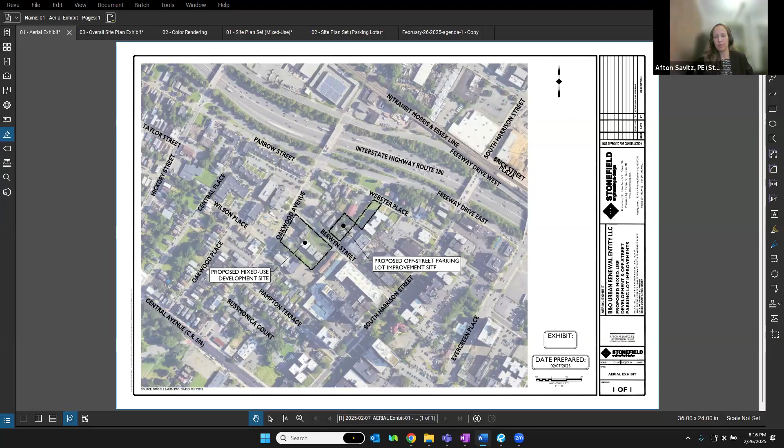I'll zoom in a little bit just to show a little bit clearer the aerial as it relates to existing conditions. Again, circling with my cursor, the bold black lines with the double dots, those are indicative of the outermost property line for the application. So along the southern portion, that's where the mixed use building will go. And again, the parking lot will be across the way.

In terms of access frontage, where these blocks are located, there's frontage for Berwyn Street, which is under local jurisdiction, approximately 100 linear feet for the parking lot, 326 for that of the mixed use building. And for Oakwood, again, similarly under local jurisdiction, 277 linear feet for the mixed use building. Continuing up on Webster Place, there is a connection with access for the parking lot on Webster Place, 60 linear feet in terms of that frontage. Beyond that, you'll note the freeway that you can connect through to, but direct access is that on Webster.

In terms of existing structures that are on the property, to the south, the larger composition of lots, there are 6 apartment buildings unoccupied on this lot. I'm sure you'll notice on Oakwood Avenue, there's a construction fence or a silt fence that's up that borders that western property line. And to the north, along the 3 lots on Berwyn Street, there are a couple single-family structures and then a vacant lot or an undeveloped lot as it exists along Webster.

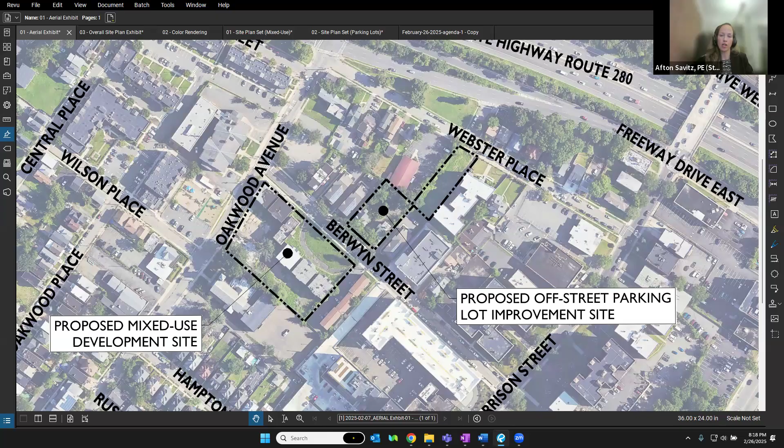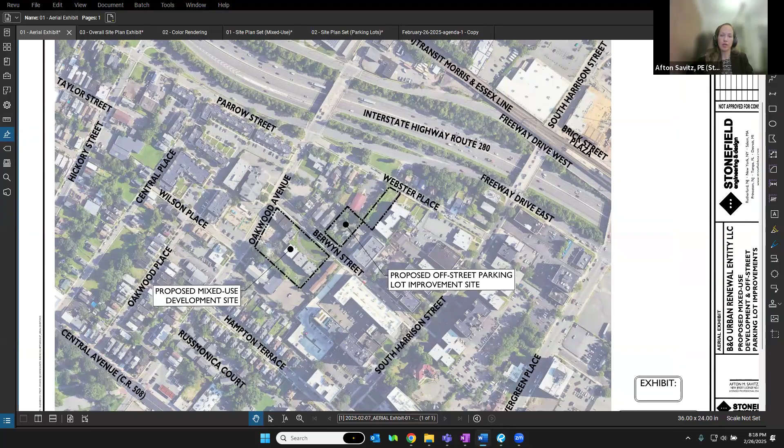Again, I'll zoom out just for the board's reference as to where this project is. My subsequent materials, some of it splits them up. It may rotate it. I do have an exhibit that keeps them together. I know the board engineer alluded to understanding the connectivity across the street to ensure pedestrian safety, but as it relates to existing conditions, I will transition from that to my next exhibit to touch on the proposed conditions.

So this will mark as A2. It is an overall site plan exhibit prepared by our office. It's dated February 25th, 2025. And it's somewhat of a similar orientation where you have on the bottom, the mixed use building and the parking lot across the way. Any material that's been submitted to you, for the most part, this probably looks like it's flipped upside down as it relates to the mixed use building, but I think it tells a nice story as to how, if you're parking across the street, you get to the building and vice versa. From here, I'll show some things in color, and I'll of course leave the architect to show pretty pictures as well, but this shows you the interconnectivity of both portions of the development.

As mentioned, and I think counsel did a good job touching on it as I'm circling with my cursor, this is the mixed use building. As it exists, as it was previously designed with very little change from the prior application. 173 residential units, 1,013 square feet of retail. Again, when I zoom in here, you'll notice from the site plan sheets that you're familiar with, it is flipped 180 degrees. So the retail is at this corner, closer to Berwyn and Oakwood. There's access as proposed off of Berwyn Street into a portion of covered parking with redundant access back out to Oakwood that's divided.

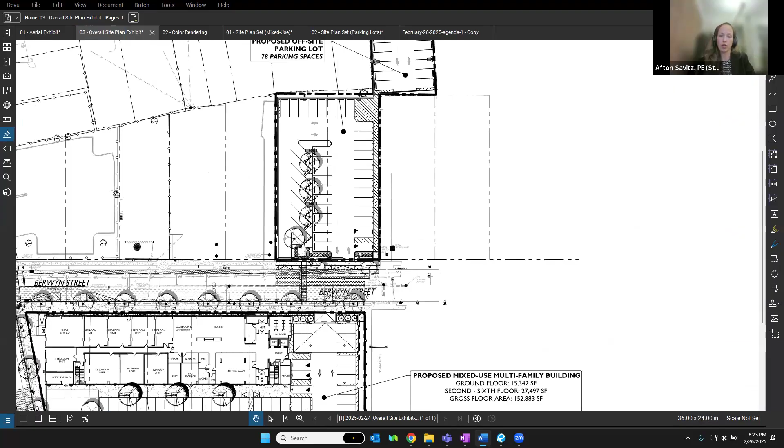I'll zoom in a little bit just to note it because it was somewhat unclear based on submitting separate documents to the board. But there is a crosswalk that allows for safe egress across Berwyn Street, and then all of the streetscape along both frontages, complete with street trees, is proposed to be improved. Again, very similar to the original application as it relates to the improvements.

Retail, I know the board engineer notes in the letter received about loading for retail. It's a little difficult to tell. I'll circle with my cursor. There is a loading space that's indicated on street in support of the retail space. We are seeking relief as it relates to the physical striping of the loading space, 8 feet wide by 25 feet long, where 10 feet wide by 25 feet long is required.

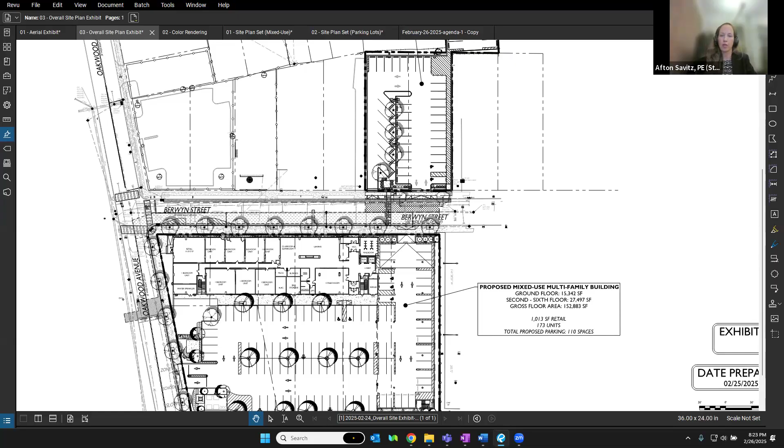But it's worth noting there's striping on either side of this space. So in terms of vehicles, whether they're dropping off Amazon packages, mail, they can certainly pull in. And when you add the striping on either side of it, that length that you yield can take a small box truck as well. So while slightly smaller than, at least as striped, the ordinance contemplates, we have worked closely with the architect, with the traffic engineer to provide adequate loading.

In addition, I will continue to focus on the parking lot as well. As mentioned by counsel, there is relief as it relates to impervious coverage. Again, one of the design constraints for this parking lot, especially previously, was how can we fit more parking, in discussion with the city, to support the application. And we've worked to do that where we can. Again, the lot is narrow. There are some limitations as it relates to the overall width, but we've balanced the parking supply, the impervious coverage, the landscaping to the best of our ability.

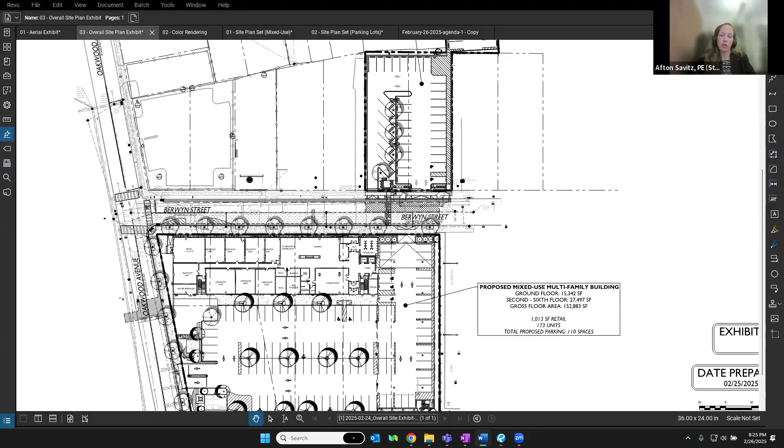In terms of lot and proposed impervious coverage, when you think about both of the parking areas together, against the ordinance where 90% is the max impervious coverage, 91.3% is being proposed. In terms of screening, along the property lines of all of the parking lot exists either a wall or an existing fence that will provide screening. We do note, as mentioned, there's relief for buffer screening, or providing a buffer off of the property line, in this case again based on balancing the parking and the pedestrian trespass in conjunction with that.

In terms of stormwater management, I mentioned that under existing conditions, all the rainfall flows over the property, over any paved area into the right of way and eventually the city infrastructure system today. Both properties, I kind of treat them as three, just knowing that the parking lots are somewhat separate, will all have stormwater management improvements. They will collect the water and slow it down, not to mention treat it to ensure that any water that's traveling over the motor vehicle surfaces is cleaned.

From a utility standpoint, the parking lot only has lighting, and then what's required for operation of any gates on the property. So new electric will be proposed and fed through close coordination with the utility provider. And the lights on the property, similar to that of the mixed use building, they're LED, they're downward facing, they're dark sky compliant in an effort to distribute a uniform lighting design. In the parking lot, there are pole lights. Again, in terms of any trespass beyond the property line, those existing fences, those walls are preventing that as well.

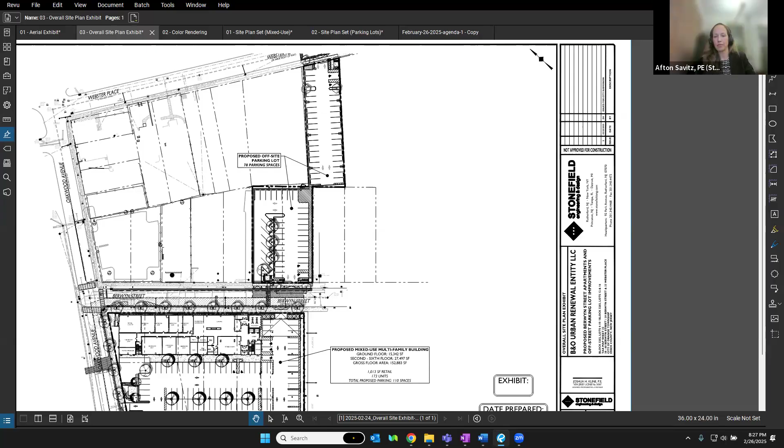I'll also go so far as to clarify for the mixed use building. I know we mentioned the relief that was previously granted regarding the foot candles as it relates to property line conditions. Those locations are in the right of way. So any of the interior property lines where you're abutting a neighbor, there's a proposed fence, not to mention no trespass as part of the proposed design. Again, I know I haven't shown anything individual to the mixed use building or that of the parking lot. I do think they tell a nice story together, so I'll leave this screen up here.

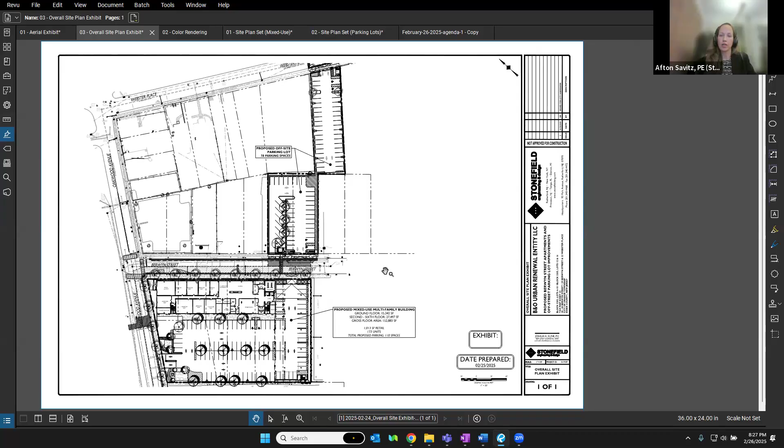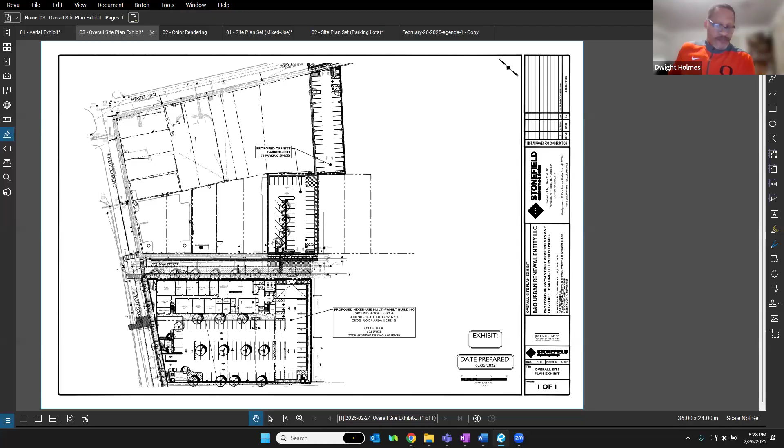This does conclude my direct testimony as it relates to civil engineering, but I'm happy to answer any questions from the board, the professionals, or the public. Mr. Holmes, I don't have any further questions for this witness. To the extent that we've completed our case in chief, I'll yield the witness to your hands. Okay, then I will ask any board member if you have any questions for Ms. Savitz. Seeing none, hearing none. Thank you, Ms. Savitz, for your testimony. Thank you.

My next witness is my architect, Stephen Tietke. Stephen, it's a little dark. Yeah, I apologize. I was trying to adjust my camera, but this is as bright as it's getting.

It seems to be a theme with Attorney Webster. He's got this very dramatic mood lighting. Yeah, mood lighting. So I guess that goes along with his professionals. Yeah, but I apologize. All right. So, all right, Stephen. Okay, gotcha.

Do you swear or affirm to tell the truth for this planning board tonight? I do. Okay. Can you please state and spell your name for the record? My name is Stephen Tietke, T-I-E-T-K-E. Okay, and let's get Mr. Tietke's qualifications on briefly. Mr. Tietke, would you please provide the board with the benefit of your education, your training? Please indicate that your New Jersey license is in good standing. Yes, I hold a bachelor's of architecture from Drexel University. I graduated in the year 2000, and I'm a licensed architect in the state of New Jersey, and my license is in good standing. And I've provided testimony before boards across the state, including, I believe, before this board for the amended approval that we were discussing.

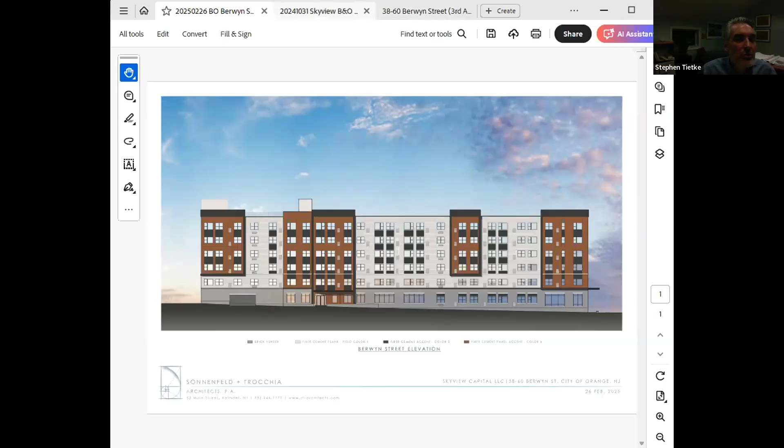I will move now to the floor plans. At the first floor, as we discussed, we provide an entry lobby, fitness room, clubhouse, game room, mail room, and leasing. We include 8 dwelling units at this first floor, a retail space and services, the refuse room, bike storage, meter rooms, and we have some covered parking as well as surface parking.

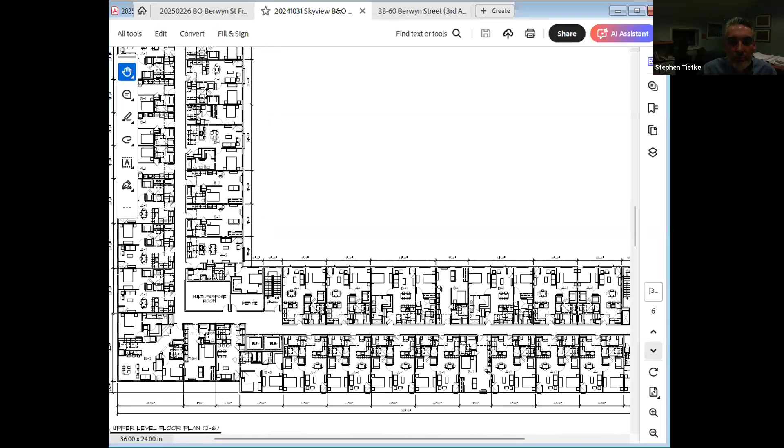On the upper floors, we have a mix of just strictly units, and we've incorporated a multi-purpose room at every floor. There's also a refuse collection room at every floor that'll have a trash chute that communicates down to the refuse room at grade. And at the roof, we're proposing a rooftop deck.

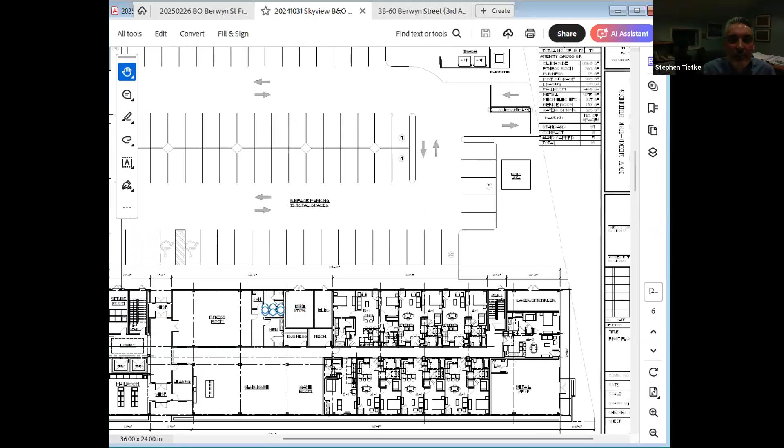The unit count would now go back to the original approval, which is 173 units, and we're proposing 41 studio units, 96 one-bedroom units, and 36 two-bedroom units. I'll go back quickly to the parking level plan because as we were discussing in the civil engineer's testimony, we are providing a roll-up door at the entry to the garage for security, and there are two arm gates at the surface parking entry. That's really my architectural testimony, unless anybody has any specific questions for me.

Mr. Chairman, I don't have any further questions for this witness. Mr. Tietke, can you speak to the, I'm sorry, go ahead, Vice Chair Jones. Oh, I was just wondering, what was the rationale for removing the school space from this? The school space, well, I think that was negotiated between the developer and the city. And I'll be honest, I don't know the particulars. Okay. Thank you. The architect doesn't know. Yeah. Okay. Make it a good guess.

I can tell you, we originally had a plan that didn't have any of the school space. During our conversations with the municipality about obtaining a tax abatement, we were introduced to the concept of working with the school board. After quite some time, going back and forth and designing the space and actually getting site plan approval from this board, the school board determined that they didn't need the classrooms. We met with the Board of Education, we met with the superintendent and their leadership, and they decided that we did not need it.

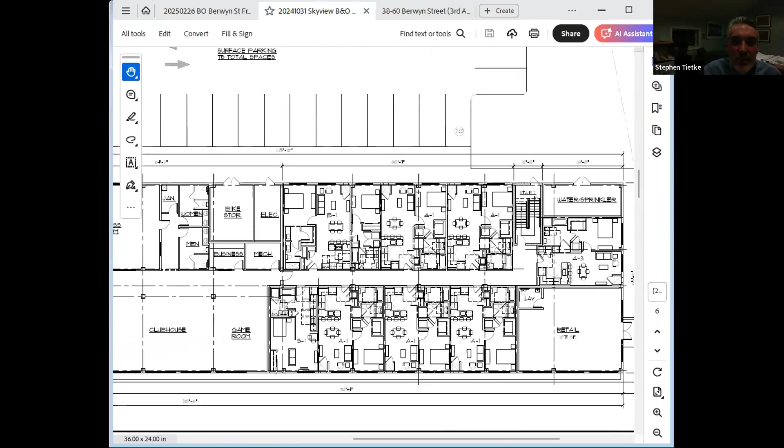The units on the first floor are typical of the units throughout the building. So we have one studio unit, 1, 2, 3, 4, 5, 6 one-bedroom units, and 1 two-bedroom unit at this level. And I can zoom in if you'd like to see the layouts. I'm sorry, how many two-bedroom? There's 1 two-bedroom at this level. One, okay. Right. And the remainder are 1 studio, and then the other 6 are one-bedroom units.

And what do those dwellings consist of? Is there a washer, dryer? Yes, all the units have their own dedicated washer dryer. They have their own kitchen. They have their own bathrooms. The studio units have a PTAC unit that provides HVAC, and then the 1 and 2 bedroom units have what we call a magic pack unit, but it's a centralized HVAC system that's specific to that unit.

So each unit has its own washer and dryer. Yes, and each unit is able to control its own AC temperature efficiency and air. Yes. Okay. All right. Thank you. Member Faustin. Yeah, thank you, Chair.

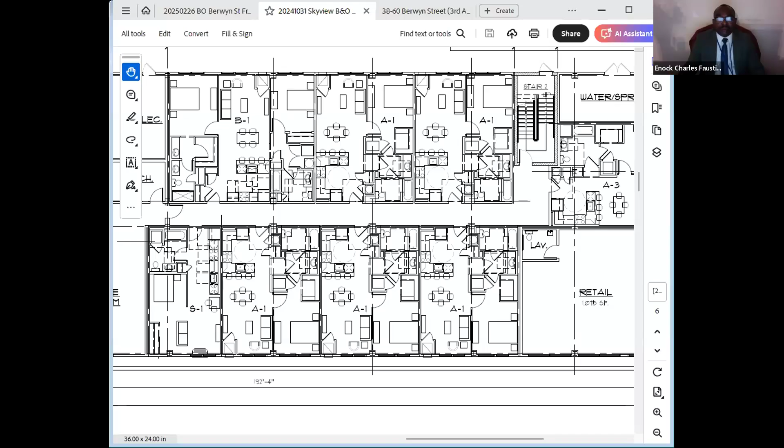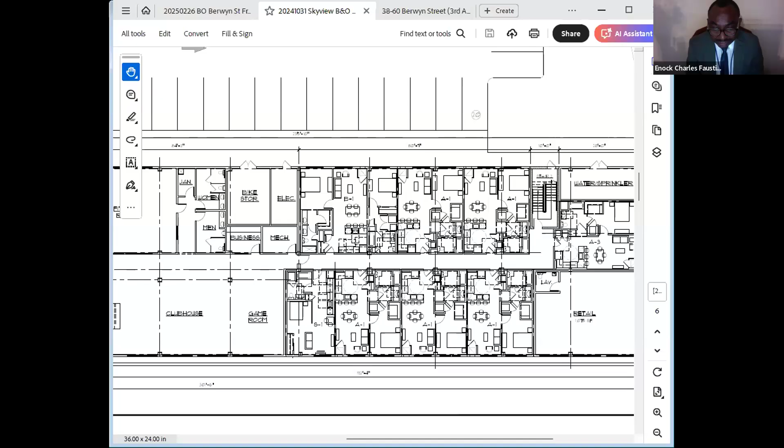I think that my question, because the town population is going up because of so many units added to the town, and I thought that adding some more classrooms would be a good thing, but it seems not the case. And this is why I encourage the developers to work with the appropriate city authorities and public officials before they engage in certain things, because if they work with the Board of Education, this plan would not come before us for a third time.

So it is the same thing we encourage when the traffic engineer works with the police department when it comes to the traffic studies. And for Attorney Webster, since you proposed to add some additional classrooms, was the town proposing some incentive for adding classrooms or not?

Okay. If I could jump in, Mr. Chairman. Mayor Warren? Attorney Wenzel, go ahead. If he has a judicial ruling, I'll certainly abide by it. Attorney Wenzel? Right. So let me say this. I think Attorney Webster had already indicated why this matter is back here in regard to a prior question. The applicant is proceeding forward with a use that is allowed in the district, and with the current set of circumstances.

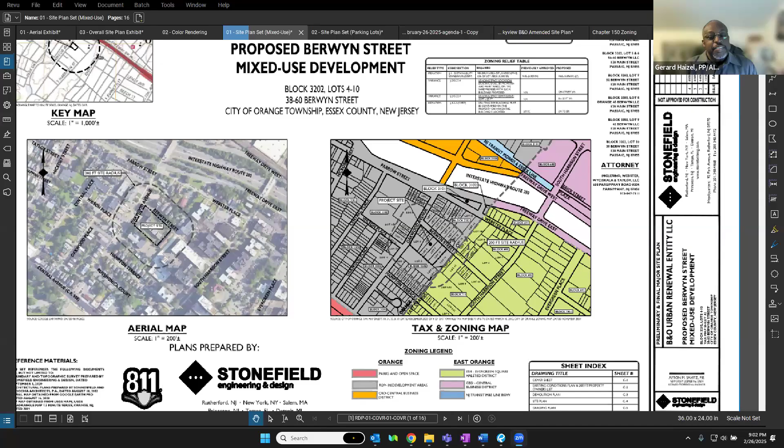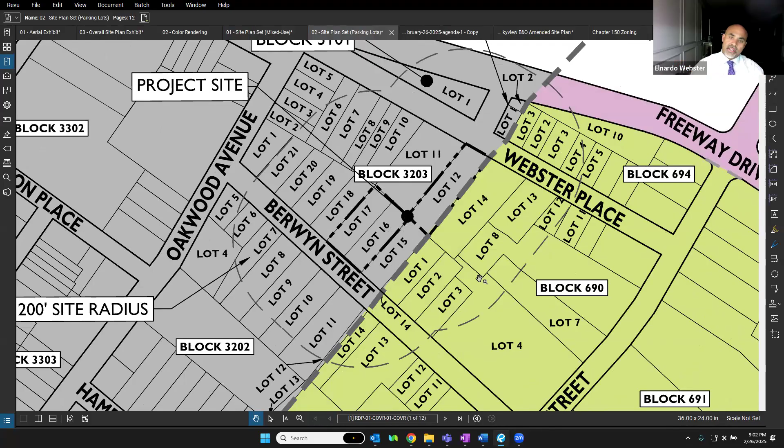If you can come down. We acquired, see the original, we had lot 12 and 16. Oh, okay. Lot 17, we didn't have 17 originally. Yes, I see it now. Lot 16 wasn't wide enough to park, so it was just a pass through to get to lot 12. And so now we've got the whole thing. All right. Thank you. I thought I caught Mr. Haizel, but he's always on point. Thank you, sir. I appreciate it. Any other questions for Mr. Haizel?

All right, sir. Thank you for your testimony. Thank you. Mr. Kahilane? John, do you swear or affirm to tell the truth for this planning board tonight? John? I do.

Yep. So sorry, Zoom raised my own hand for me. Wasn't sure if I hit that button somehow, and was working on that. Excuse me. Good evening, everyone. I will keep it brief as well.

I have not had the opportunity to be here for every revision, but I've had more than enough time before the meeting and at the technical review committee to get familiar. The board has my report as well. The one item I will mention on that is a correction I have to make for myself. There is a typographical error on page 4 in the off-street parking requirements table.

The value of 90% is actually for the building coverage in this area of the redevelopment plan. The total impervious coverage allowable is 95%. So there's not a variance condition for impervious coverage on those properties as a whole. And then the applicant's professionals covered the various testimony items in my report. In particular, I believe it's Exhibit A2 with the crosswalk. That was very helpful for me in determining the location of the crosswalk relative to the vehicular ingress and egresses.